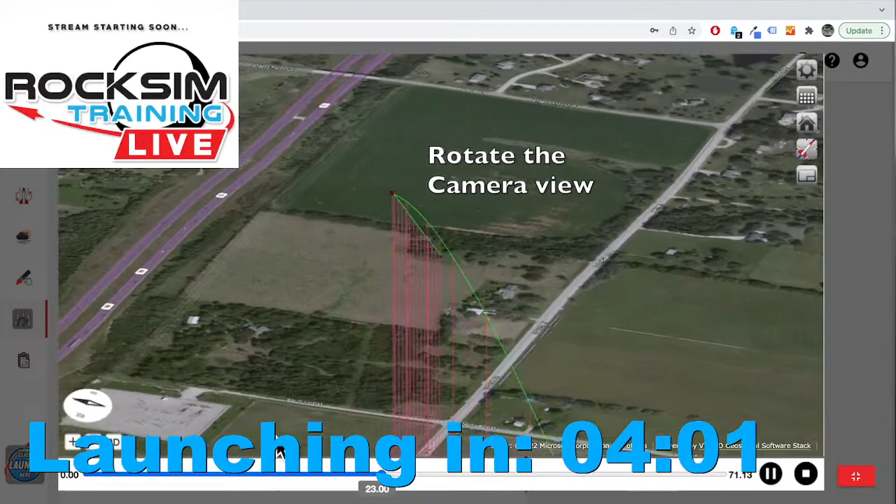Does it go straight up or does it arc over? Does it spin as it ascends? What happens once the recovery system is deployed? Where does the rocket go? How far away does it land? Will it touch down in a location where you can easily recover it?

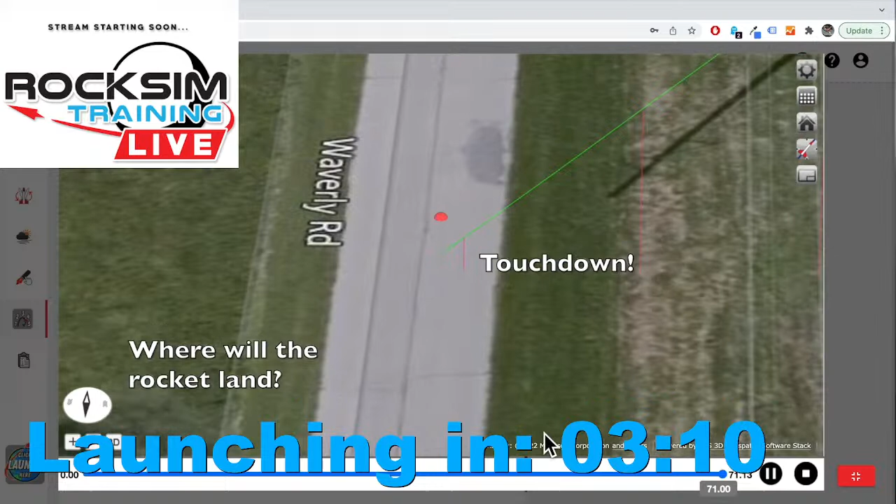Most rocketeers seem satisfied with just being told how high their rocket flew, and that's a shame. How did the rocket get to that point? That is what you should really be concerned about. The story of your rocket's flight is not just a peak altitude number. The real story is the trajectory path that your rocket takes during the flight.

Does it go straight up or does it arc over? Does it spin as it ascends? What happens once the recovery system is deployed? Where does the rocket go? How far away does it land?

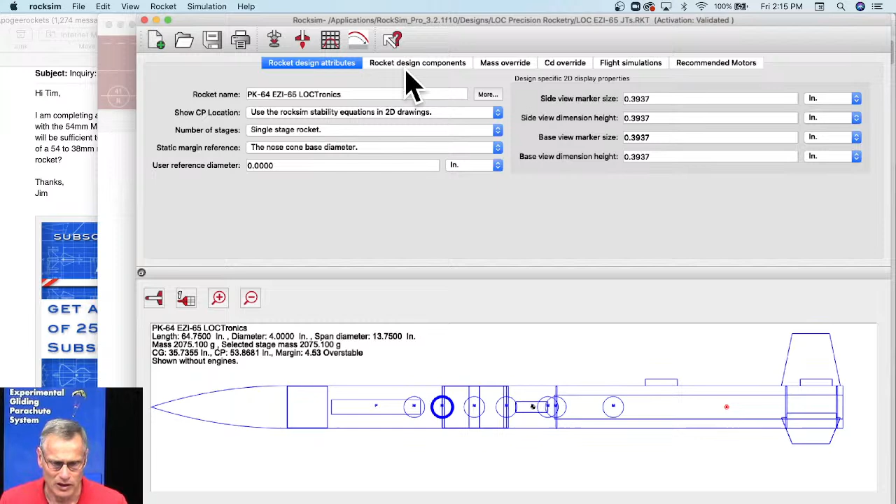So one of the first things that you might notice if you're using RockSim previously is now there's circles in the 2D drawing. And what those are is mass objects. We did that so that you can click on them and highlight them. This is one of the new features. Let me quit on that so we don't get these notifications popping up. So it's like this one here is all these mass objects, and you see these mass objects here in the parts tree.

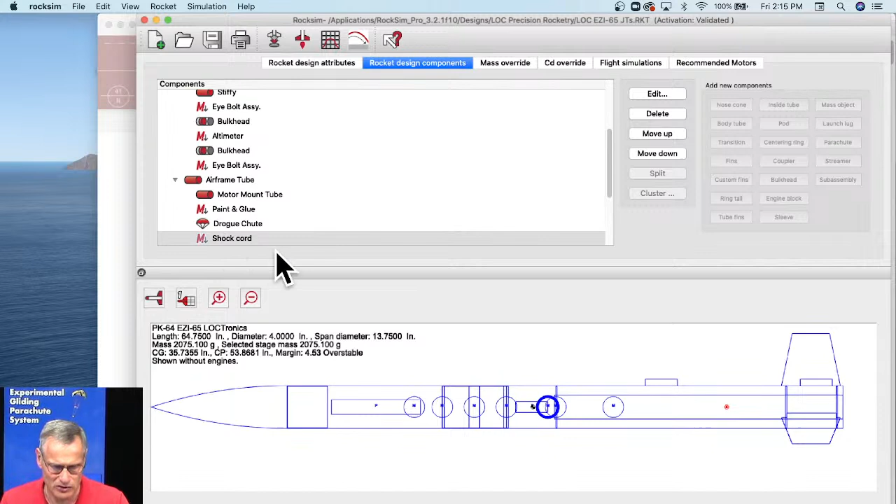But I don't know which one it is, but if you click on them, like if I click on that one right there, it highlights it up here and it says that this mass object is the paint and the glue. If I click on that one, that's an eye bolt assembly. That one right there is a shock cord. So we did that so you can find them easier.

And similarly, in the 3D view, it'll be the same thing. You'll see those components highlighted. So right now I'm clicking on the shock cord and you're seeing everything else grayed out except for that mass object. So the mass object in the 3D view is now a sphere. So if I click on the paint and the glue, here's an eye bolt assembly. It shows me where it is in the parts down here.

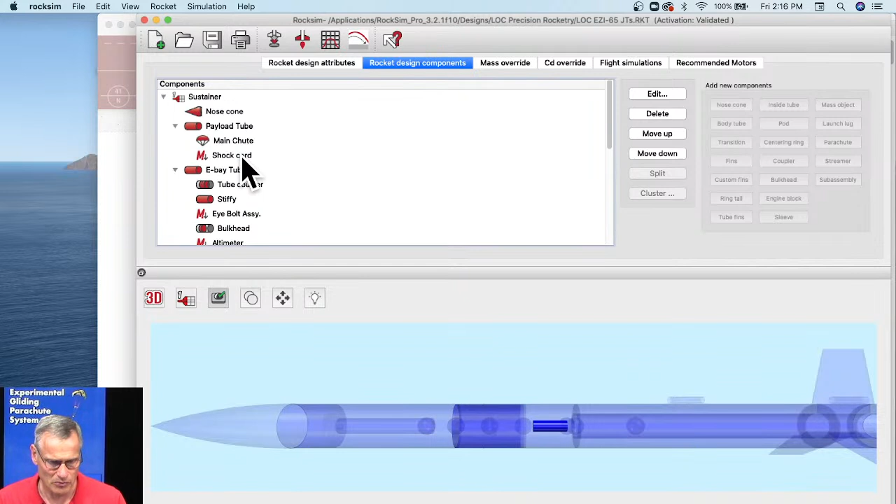Another change is that parachutes didn't used to show up in 3D, but now they do. They show up as cylinders, like right there. So that's a parachute. This one's set up as dual deployment, so it has two parachutes. And if you want to see the full rocket, you just click off of it.

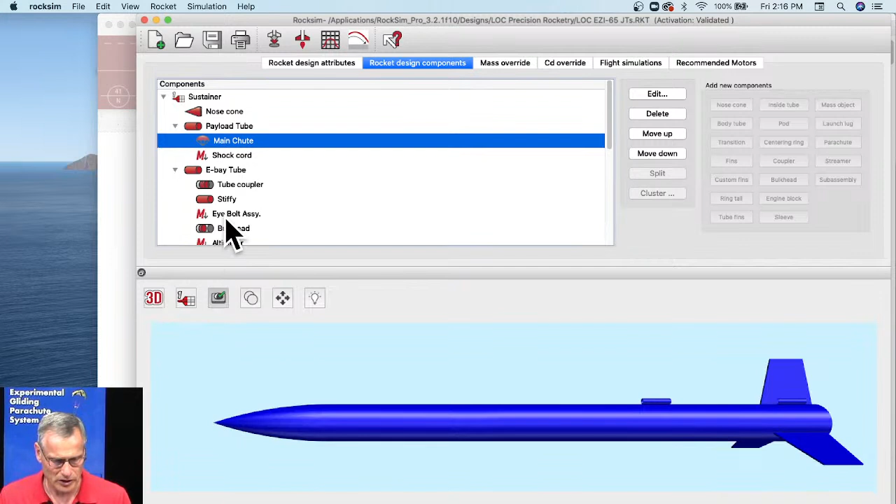Okay, so that's the new stuff, but we're here to answer how to do a motor adapter. So let's find the motor adapter. So it's inside this main tube. Launch lug, motor mount tube right there. So here's our motor mount tube, and I just want to confirm that it's a 54 millimeter, and here's where you confirm it. It says the motor diameter that fits into that tube right there is 54 millimeters. All right, so that's good.

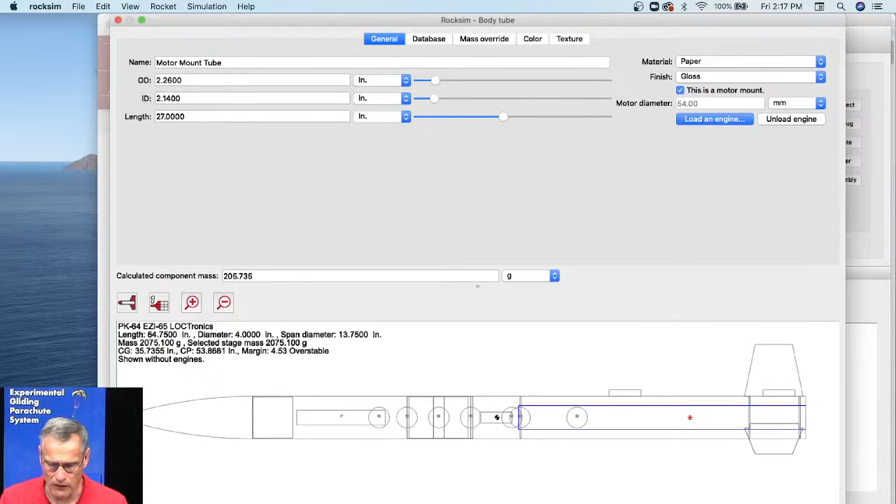Click OK. All right, so now there's two ways of adding the motor adapters. There's an easy way and a hard way, and I'm all for the easy way. The easy way is basically what we just talked about, a mass object. Putting a mass object inside of the rocket to account for the extra weight of that item. And the reason I can use a mass object is because it's on the inside of the rocket and it doesn't affect the aerodynamics. It's only going to affect the mass of the rocket. So I can use a mass object. So I'll show you that way first.

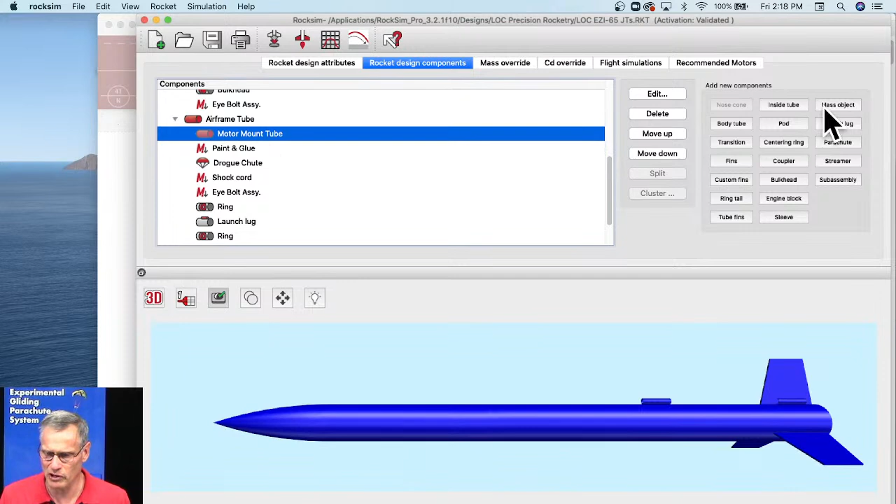First I got to decide where I'm going to put that mass object. And let's see, we just had that motor. Okay, so the motor mount tube is highlighted. Once it's highlighted in the parts tree, you can come over here to mass object. Okay, and it looks in the database for different mass objects that are already in the database. And if I enlarge this, there might already be. So we got Aeropack retainers, 38 millimeter retainer. I'm looking for maybe something that says adapter.

I'm just scrolling through here. I'm not seeing anything. Sometimes they're in here, sometimes they're not. You can add them if you want. Here's a slimline adapter. 54 to 38 adapter. I don't know what a slimline adapter is, so I'm just going to cancel out of the database.

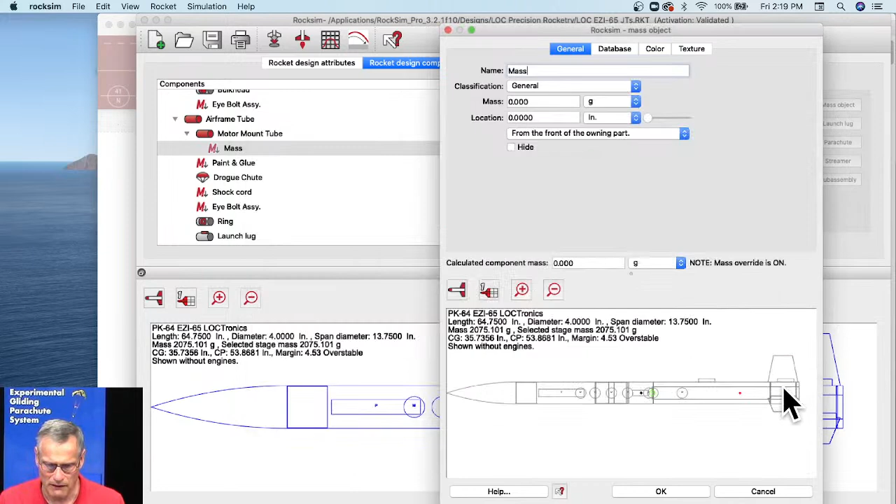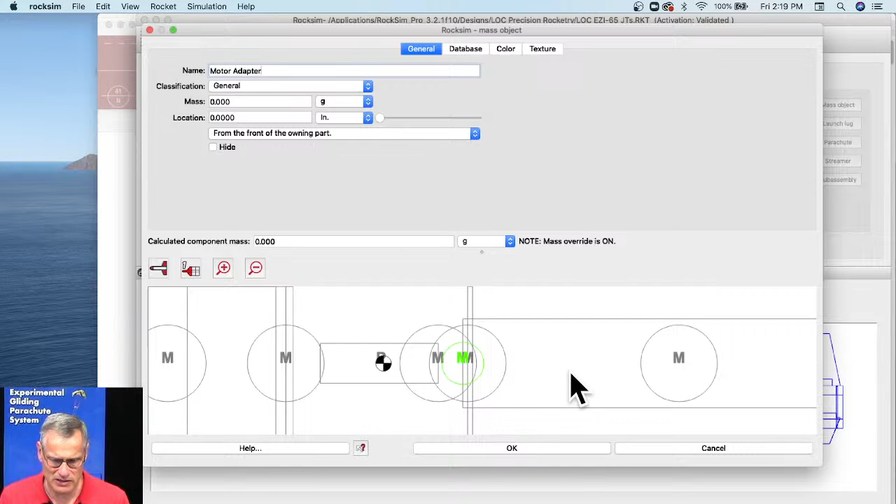And so right now on my parts screen, if you can see it, it's right here. I got a new sphere showing up. It's green right now. And this is going to be my motor adapter. And I'm just going to type it in. But now I need a mass, and then I need to switch the position. And I can move the position pretty easy because I know it's going to go back here. So I'm just going to change the location of that motor adapter. I'm just going to put it right back here where I think all the weight is going to be concentrated.

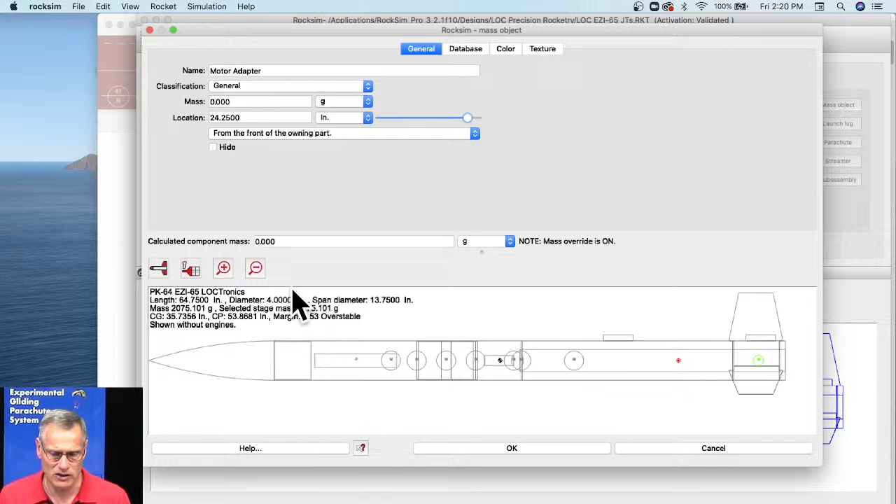Notice here, this is another new feature in RockSim 10.5. We have a hide button, and this is only available on mass objects. And this would be a good condition to use this. You can hide the mass object from the weight of the rocket so it doesn't see it. So it's kind of like if you pulled your motor adapter out, you could still fly the rocket, and then you could put it back in and do more simulations with the motor adapter in.

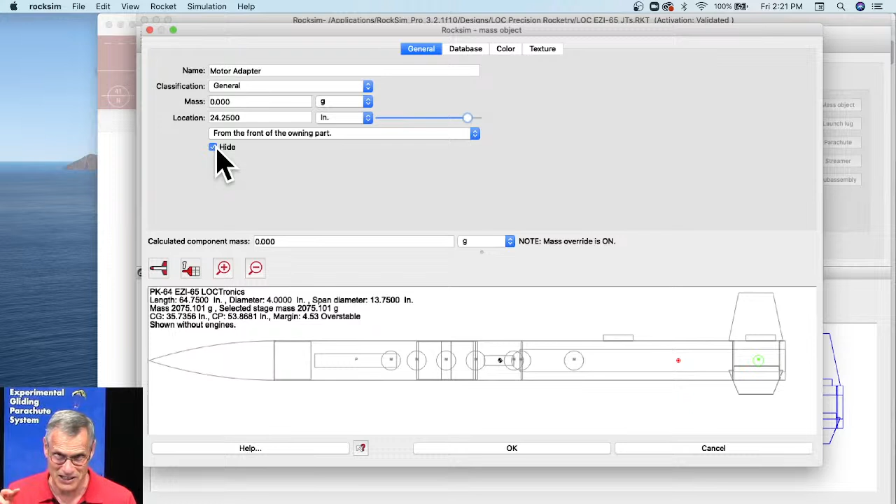So this is a new feature. The ability to hide mass objects was always in RockSim, but it was a hidden feature. You didn't know it was there. In fact, I didn't even know it was there. Somebody pointed it out to me. They were clicking on things and they discovered how to hide it and unhide it. But we made it more formal where it's easier to hide and unhide.

But I don't know the mass of this adapter, so how do I get that? So I'm going to go to the Apogee website and I'm going to search for an adapter and see what shows up. Okay, so it's not showing up here. Reload adapter system, 54 reload adapter system, motor adapters. Let me try that one. Nope. Okay, so I know where they're hidden.

They're under shopping. Go to building supplies, and then go to, I'm looking at the pictures, looking for my motor adapters. Right there, motor mount kits and adapters. So click on that. And we want a motor adapter kit. Okay, so now they're sorted from smallest to biggest. So I'm going to jump into the big sizes, 24 to 38. We want a 38 to 54. Okay, so there's one right there, an Aeropack 38 to 54 motor adapter.

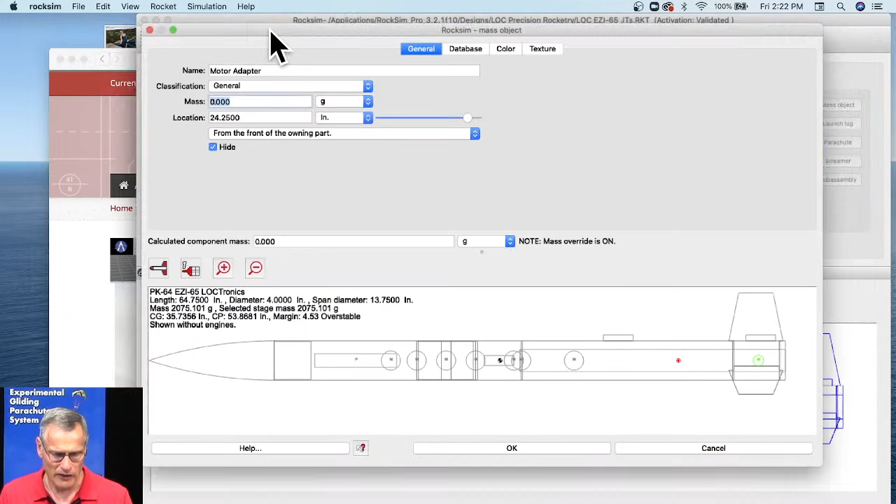So I'm going to click on that, and here's the weight right here. So 86.5 grams. So I'm going to go back into RockSim, and that's what I'm going to use for my mass, 86.5 grams. Make sure your units are right, and then hit tab. And when you hit tab, you'll see the mass change here, or maybe it already changed. Nope, I got it hidden. So when I unhide it, this mass should jump up by 86.5 grams. And sure enough, it did.

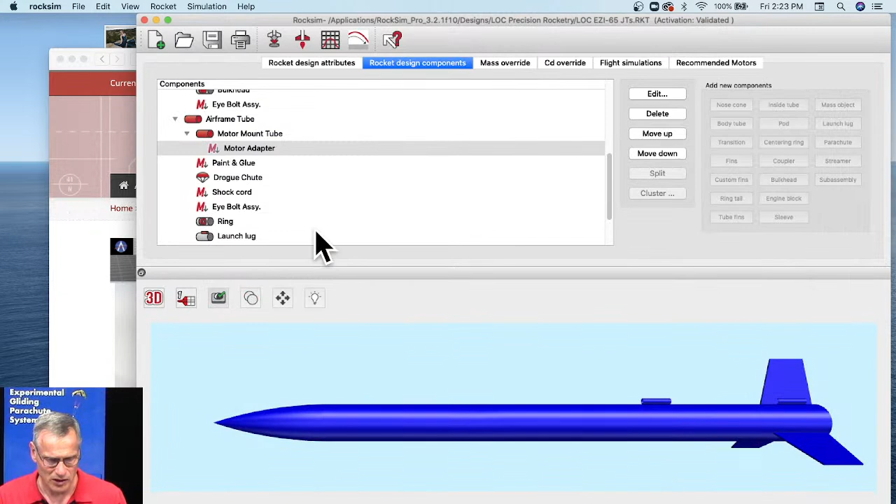So that's what it does, it kind of pulls it out of the rocket, even though it's there, but it's not there. So make sure that you check this. I'm going to leave it hidden, and I'll show you where you'll see it. Click OK there. So now my motor adapter is added. So that's that motor adapter. There should be a little thing that says hidden here. See, if you right click on it, it says show hide, and that's how we found out that it was there.

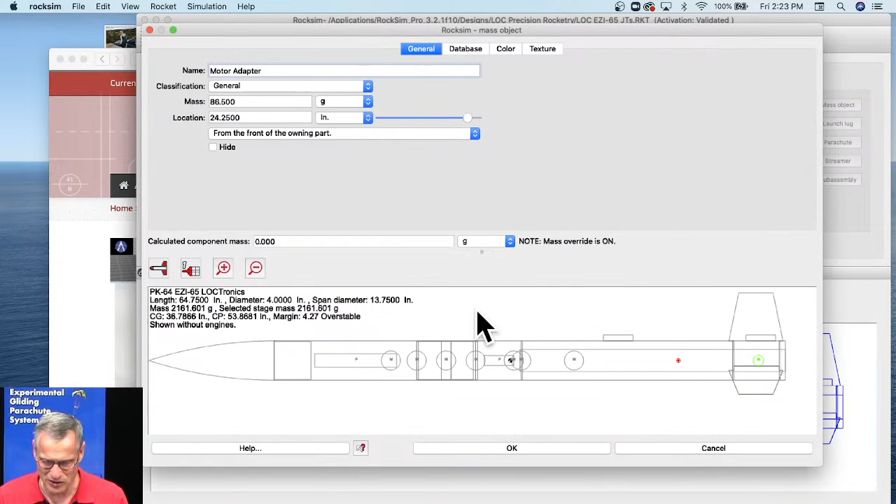So what's going on? I just want to make sure it's not hidden. Okay, it's not hidden. I'll click OK. Okay, so that's that motor adapter, and now if I click on it, sure enough, it's still there. Now we can run our simulation. So I'm going to go to prepare for launch, choose an engine, and see right now it's showing just the 54 millimeter motors, but I want to show 38s.

So I'm going to go show those that match or are smaller. So if I do that, now I see all the motors. You can see I'm scrolling through them. You can see the different diameters. I can sort them by diameter just by clicking on the column. And so now they're sorted. And if I scroll down, I should eventually get to the 29s and then the 38s. Okay, so here's the 38 millimeter motors that will fit. I'm going to choose a J270. And I'm going to choose a 14-second delay, and I'm going to click OK.

And what I wanted to look for, and this came up, somebody asked me this the other day, is what happens if you put a motor in a rocket and the motor mount is short. This one has a really long motor mount. But what if it's short? How do you tell if the motor is going to interfere with a bulkhead? And in RockSim, unfortunately, there's no way to tell except by actually looking at it.

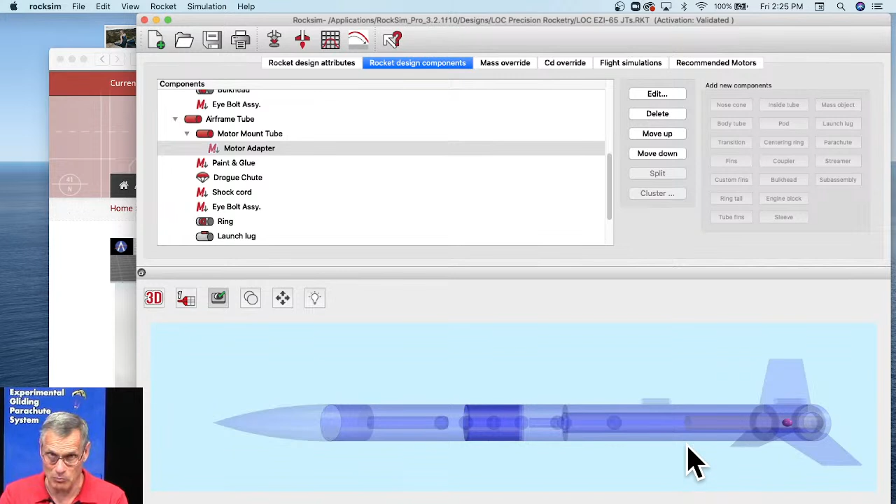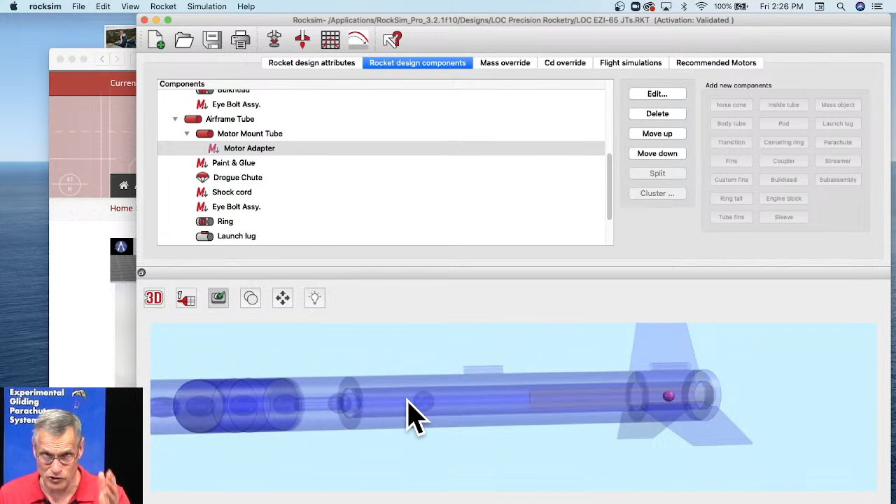So I don't know if you can see it here, but the rocket is translucent. There's the motor tube right here. And then this darker blue one here is the motor tube. So here's the motor tube, and this one does not stick out. So that's what you have to look for. You actually just have to look at it from the side view and see if it sticks out. So this motor will fly, and I can go and launch it.

I just want to double check my simulation conditions here. Flight events. This has got dual deployment. So the main chute is at an altitude of 400 feet, and the drogue chute is set at apogee.

We're going to have to change the launch rod, make it 98 inches. Launch angle, we're going straight up. Launch conditions, we're at altitude 700 feet above sea level, and we got some wind of 6 miles an hour. And if I do flight profile, I can see what it's going to look like.

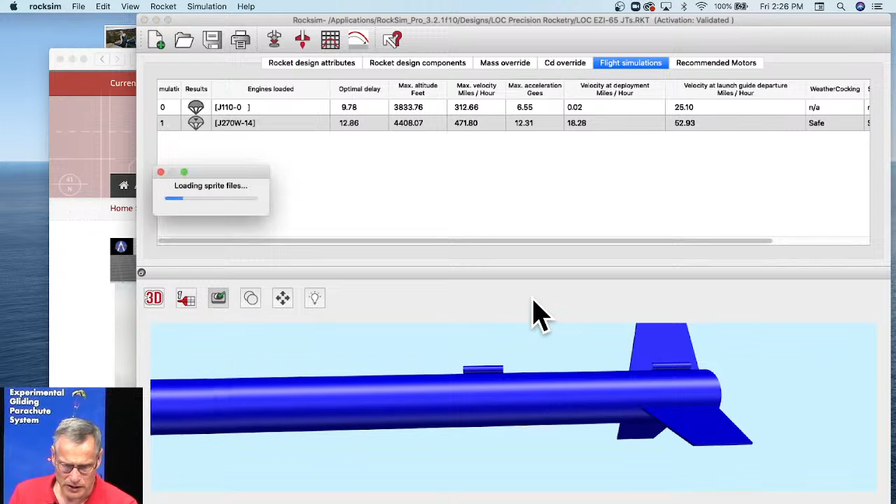So here's the rocket down here at the bottom. And when we launch it, you'll see the rocket take off. Here's smoke coming from the motor. The motor's burned out. Now it's coasting. It's well over 3,000 feet right now. I don't know if we're going to get to 4. Yeah, we got to 4,000.

And it's hitting the top. Apogee, the parachute popped out. So that's the drogue chute. And it's falling pretty straight. And when we get down to an altitude of 400 feet, we'll see the main parachute come out. And I'm going to speed things up by grabbing the slider. You can see it's coming down pretty fast. We're at 700, 600, 500, 432.

Okay, so now at this point, the main parachute came out. And you can kind of tell that the path came down straight, but when we got to this point, it kind of dog-legged. So that tells us that the main parachute came out. And this one landed only 292 feet away, so it's not too far away. So we're not going to have to walk too far to get it.

So that's good. Our apogee point was within the weathercocking cone, these dashed lines right here. We want the rocket's apogee point, the highest point in the flight, to stay within that cone. That tells us it's going more up than sideways, because we don't want it to go sideways, because that's not safe and it makes for a longer walk.

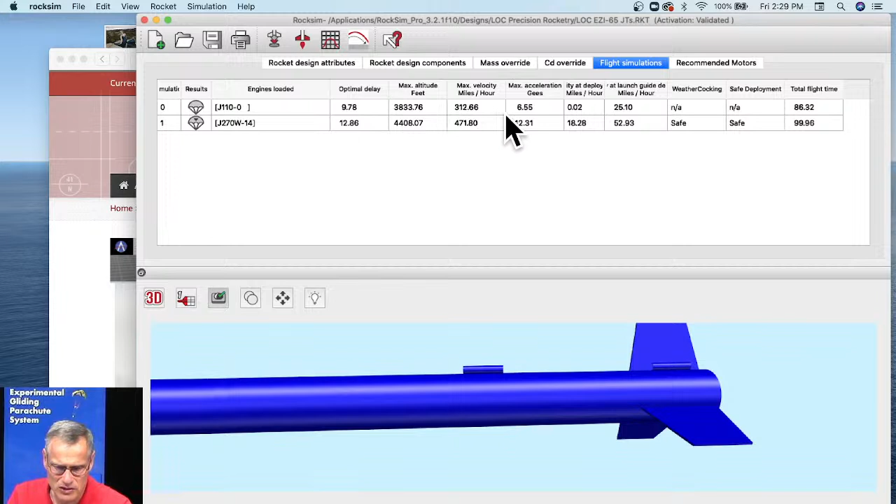So the second part of his question was how do you tell if these are safe flights? Well, one is you're looking at them, and you're looking at these conditions right here. You can also run the recommended motors. And again, you go to prepare for launch. Then you just click on this button right here. And there's this thing that says use smaller motor diameters too. So I'm going to click OK.

And the engine type, I'll just do single use to do a shorter number of motors. Otherwise, if we do reloads, there's hundreds of them. I'm going to make it an 8-foot long launch rod. And we'll just do the Aerotech motors. And then it just says run recommended conditions, and it's going to run 61 motors. So that's 54s and 38s. Usually it's not going to run all the smaller motors, smaller than 38. I think it just does one size down.

You see, it runs the simulation twice. The first time it did 61, now it's doing 30. So approximately 31 motors it didn't like. And it says RockSim not recommended. That's this column right here under the recommended motors tab. So before I was under the flight simulation tab. Now when you hit the recommend motors, it jumps to the recommended motor tab.

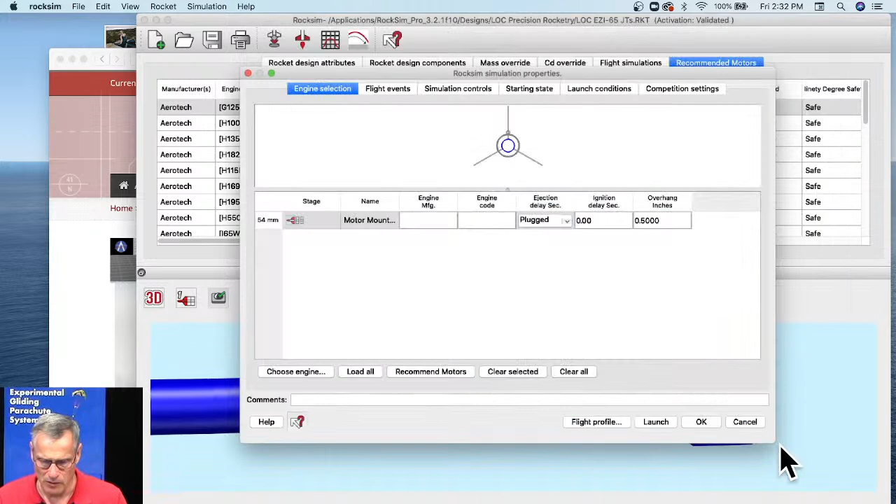So if I go to choose motor, now I'm looking for a G125. So I'm going to sort by the engine code and then scroll down to where I get to my G's. So here's a G125, and look, it's a 29 millimeter motor. So that motor is a 29. But that's how I had to find out that it's a 29.

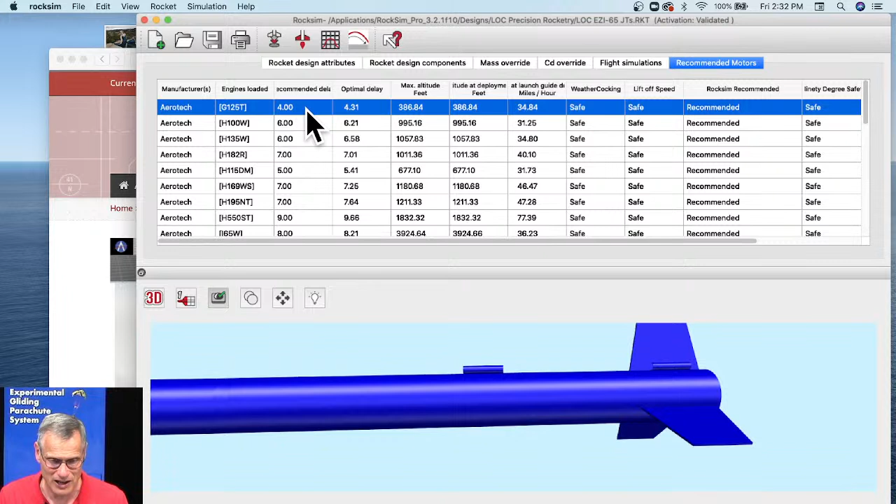But that is a recommended motor. RockSim says that should be safe to fly, so I would probably be okay with it. It doesn't go very high, only about 386 feet. But yeah, that's a 4-second delay, so you'd have to really drill down and adjust the delay by drilling it out to get down to 4 seconds, because I don't think that's a normal delay.

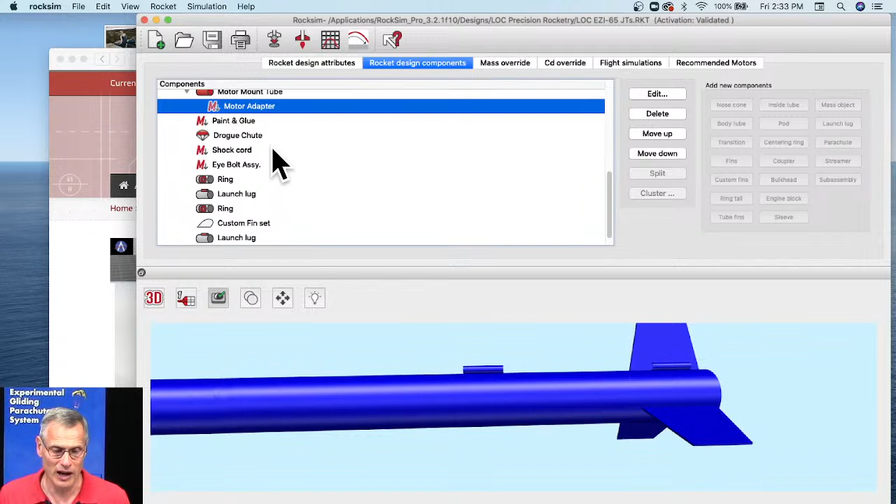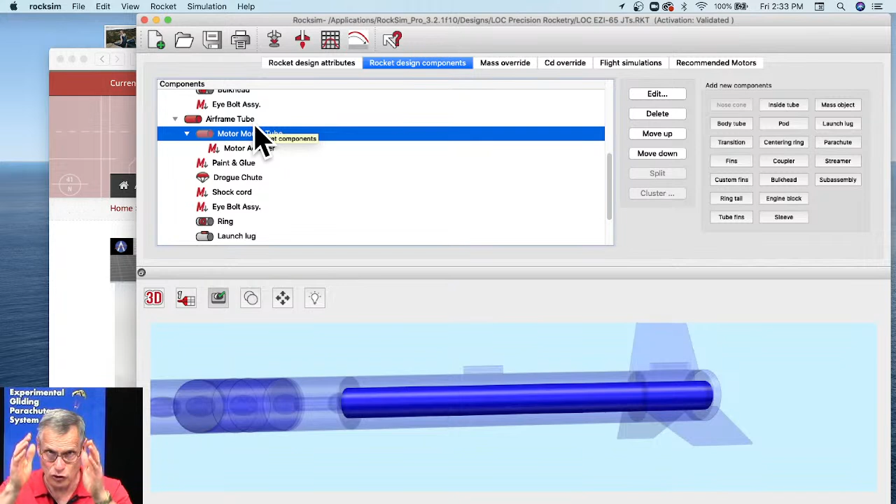So that was the quick way of putting in a motor adapter, is just to use a mass object. It's fast, it didn't take us any time. The long way would be to actually create a set of parts inside of this tube. So on this motor tube, right now it's a 54. If I wanted to put a 38 in, I'd have to start building it out of the components. So I'd probably need a motor tube and then two centering rings, one on each end of that motor tube, to create my motor adapter.

So that's the long way, because you're adding parts. And once those parts are in there, I guess you could add them as a subassembly. So you could save it and pull it in and out of your design. But using the mass object is so much easier.

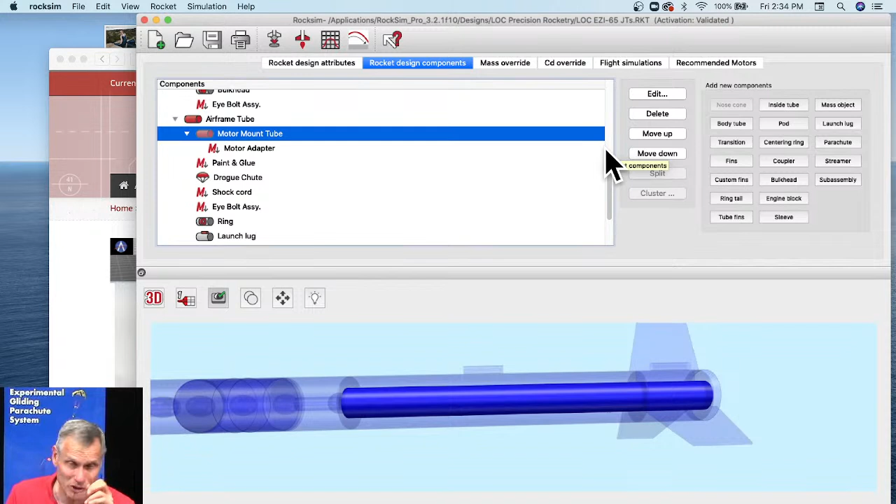Let me check my questions over here. Oh, we got people talking again. Last week we had a lot of questions, and maybe we're going to get a lot more. Terry Wheelock says, design a Concorde SST in RockSim. I can maybe show you something that's close. Johan says, I have an Estes low boom SST. Cool. Unfortunately, toasted the extended engine tube after second flight. So he had to reinforce it.

Chris Swainson says, is there a new RockSim update? And I talked about that at the beginning of this video. There is a new update. It should be available very early next week, maybe Monday or Tuesday. I am using the new update myself right now, but we should get that out pretty quick because it's done. Johan said, maybe nice question to show how RockSim handles asymmetric fins and stability calculations over 360 degrees. Okay, I can try to answer that one, Johan. Fatbank says, Tim said it should be available Tuesday, might be released on Monday, maybe.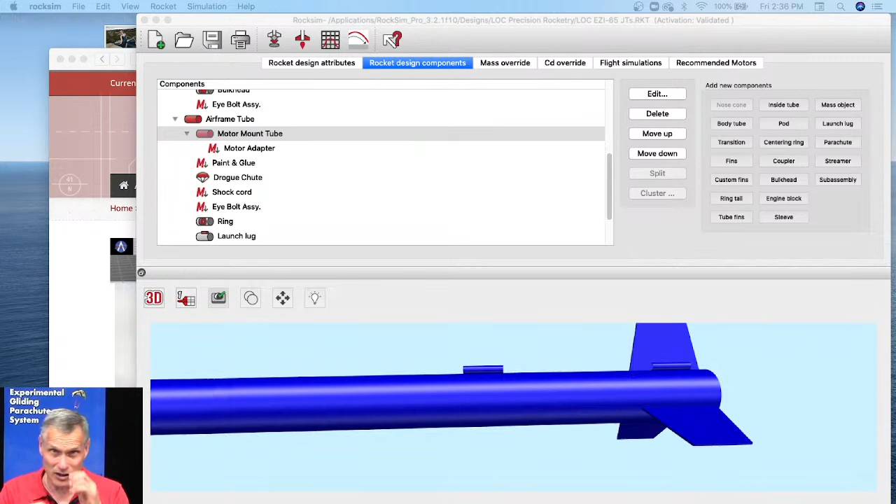Carlos says, I'm building a super roc, so I am joining tubes end to end with couplers, glues, and prayers. Any RockSim or finishing painting tips? So what a super roc is, it's just a really long rocket, and it's got a lot of couplers in it. So if you're looking for painting tips, there's a lot of information on the Apogee website. Go to How To and Guides.

Come down here to Peak of Flight newsletter. Click on that, and then go over here to All Newsletters. And you'll find them in here. So I'm going to search on this page for painting tips. Don't use the search bar because this will search the entire website. I only want to search this page because I know this is where the information is going to be. So to do that on your computer, do a Control F on the keyboard. On the Macintosh, it's Command F, and it brings up a special search bar that will only search the page.

And I'm going to say paint. And it tells me there's 4 matches that have the word paint, and it could include the word painting, because painting does include the word paint. So you can just scroll through these. It says techniques for challenging paint jobs, how to build and prep a model rocket for paint. I'd probably start with that one there, Carlos. In fact, I'm going to click on it right now. Open it in a new tab. How to build a model rocket for paint.

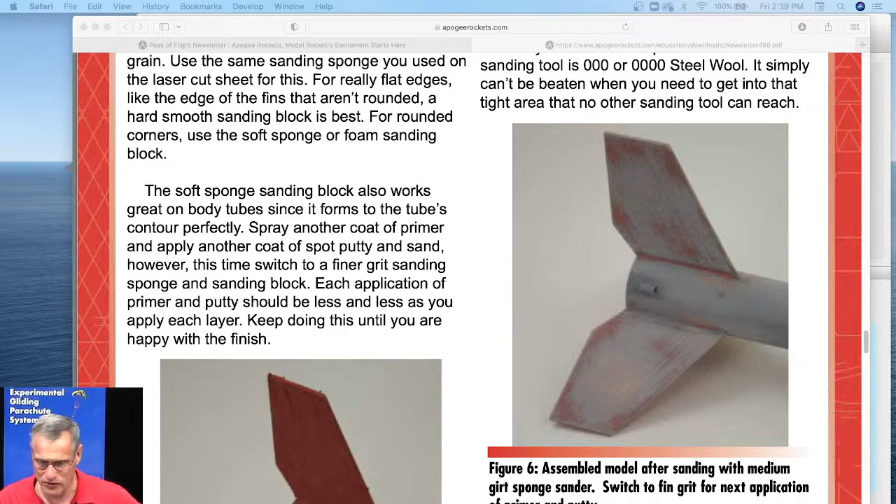Fatbank asks, do launch lugs and rail buttons affect aerodynamics in RockSim? And the answer is yes, it does. You can see that in RockSim if you go to the rocket menu and then come down here to CD analysis, you'll see right here there's a CD type of lugs. Right now we're not seeing anything because we're at 0 miles an hour, but as soon as you move the velocity up, you can see that the launch lugs on this particular rocket contribute 5.6% of the drag. So yes, that's an easy question to answer.

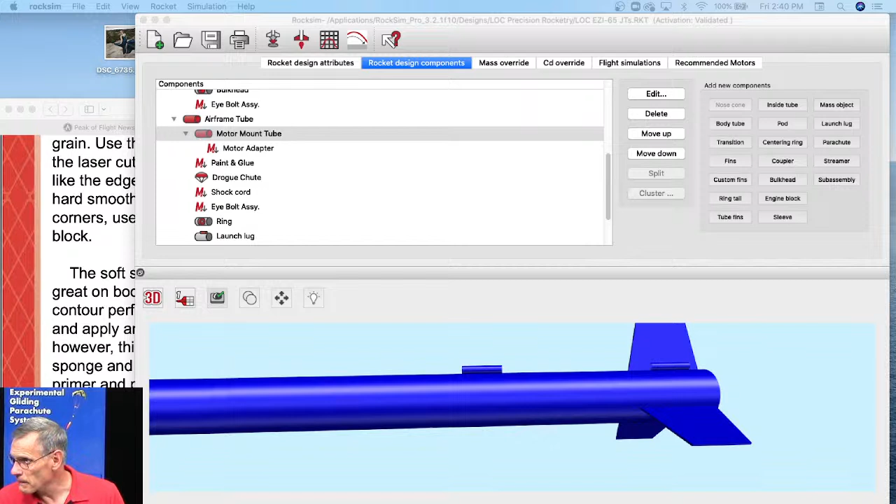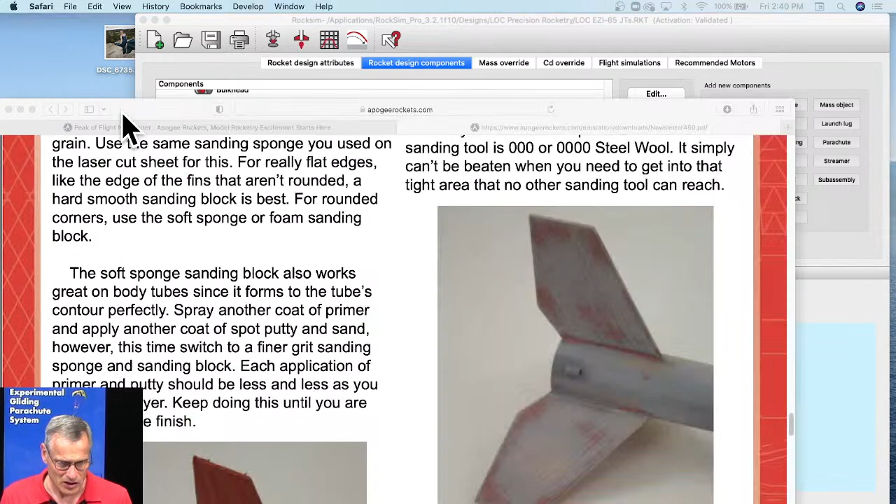Okay, but there was a question above. So we have an SST question and an asymmetric fins question. I can answer both of those with the same rocket design. So I want to go back to the Apogee website because I want to find a rocket that looks like an SST. I know there's a Semroc rocket. They did a reproduction of an Estes. So if you click on shop and then come down to rockets by manufacturer, click on that, and I'm going to scroll down until I get to the Semroc rockets.

Okay. Starship Vega. I'm trying to remember the name. Could be the USS America. Let me open that in a new tab. Okay, so this has wings on it, but that's not the one that I wanted. That would work. Let me blow that up so you can see it. So that's not quite supersonic SST style. It's not the Andromeda, UFO Invader, Starship Vega, or Starship Excalibur. Nope, not Vega. One last time. Vertical Transport, Super Hornet, Hydro Defender. I don't know. We'll go with the USS America.

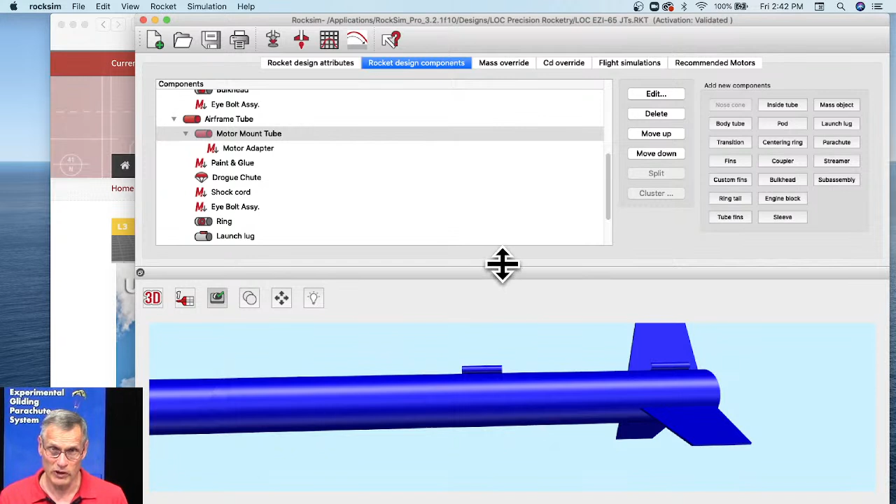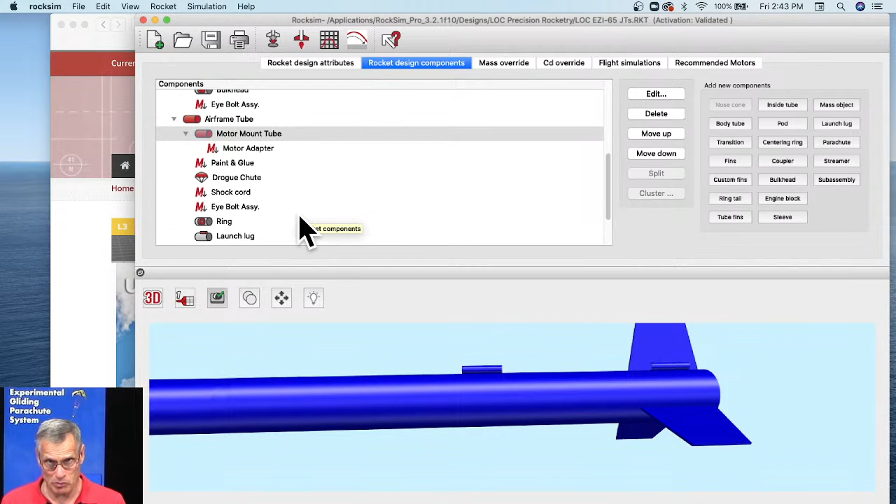Okay, so I'm going back to RockSim. Ernesto, the difference between RockSim, RockSim Pro, and the launch visualizer. RockSim was the first one we came out with, and it's our most popular because it can do a lot and the price point is pretty reasonable. Then we came out with RockSim Pro, which has more features than RockSim, and it has what's called the launch visualizer built into it. So it's 6 degrees of freedom.

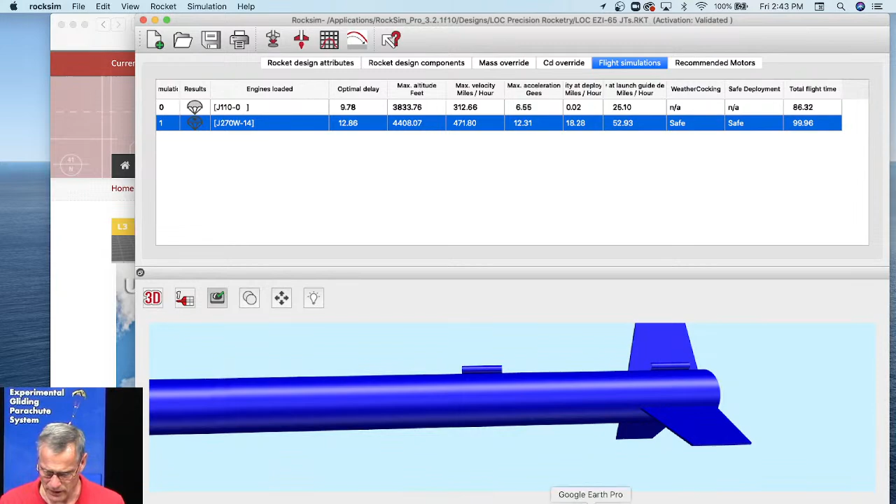I don't know if you remember when I showed you the 2D flight profile. So this is the 2D flight profile. It's this button right here, and it shows you the trajectory of the rocket. This is just a 2-dimensional representation. RockSim Pro is 3D because of the launch visualizer. I think I have RockSim Pro open. Yes, I do. So here's RockSim Pro. It looks a lot like RockSim. The difference is it still has that profile, but instead of seeing it in 2 dimensions, just a flat screen, it's going to be 3 dimensions, and it's going to be on the Earth.

So let's open up the USS America. We'll see if we can talk about a lot of different things all at once. USS America. Oh, there it is. Right here, Semroc USS America rocket. Click open. Save changes to that one? No. Okay, so here's the back view of the rocket. If I look at it from a 3D perspective, there's the rocket in 3D. It's all blue, which means that I didn't design it because I don't design blue rockets.

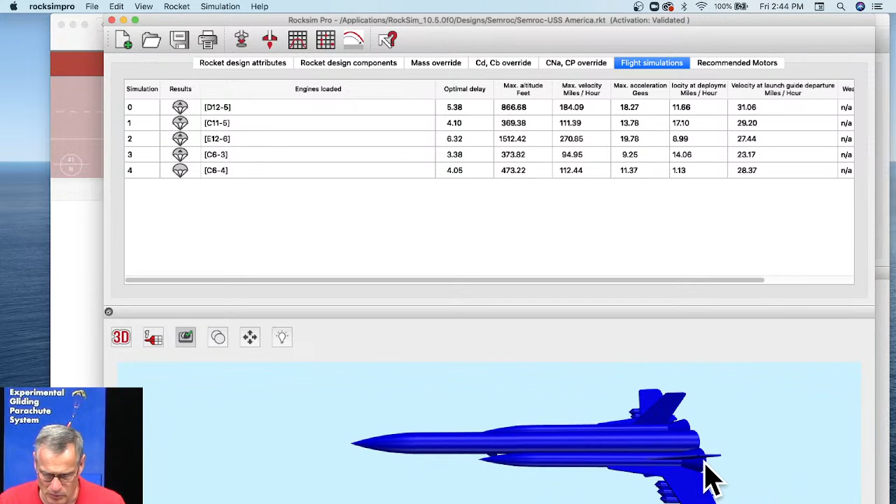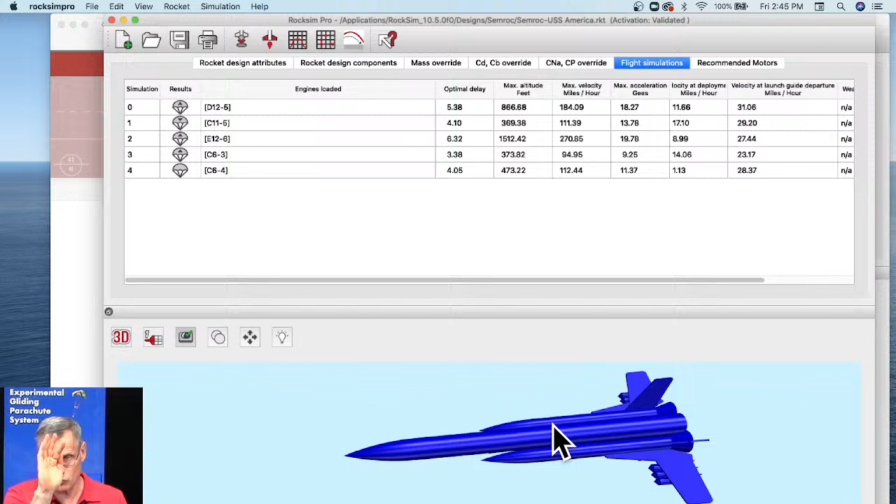But this is an asymmetrical design because in a normal symmetrical design, see these two fins here that extend vertically? If it was symmetrical, I should have fins coming out the bottom as well. So this is an asymmetric design because no matter which angle you look at it, it's different each way. On a normal rocket, like here, the Peregrine Junior, no matter which way I look at it, it's symmetrical all the way around. This one right here is asymmetrical.

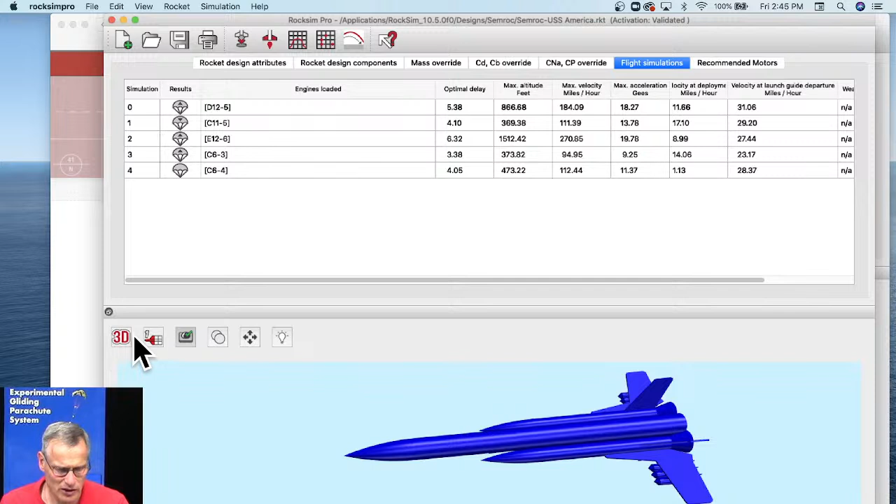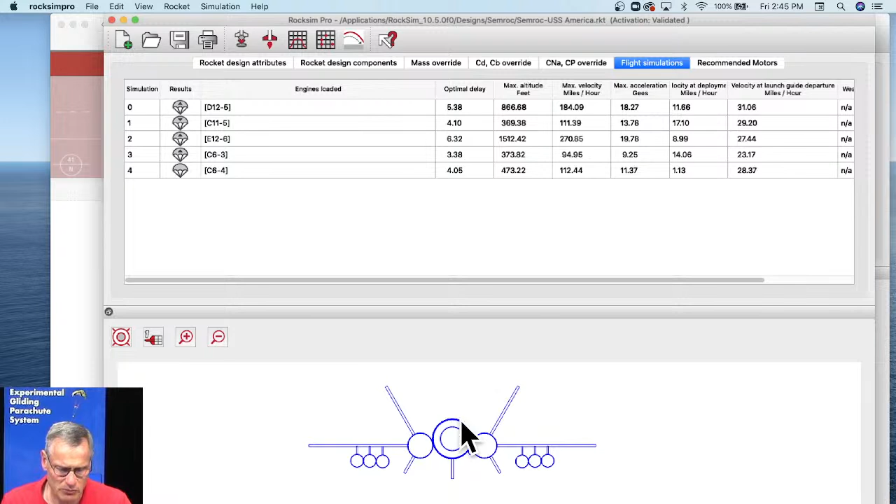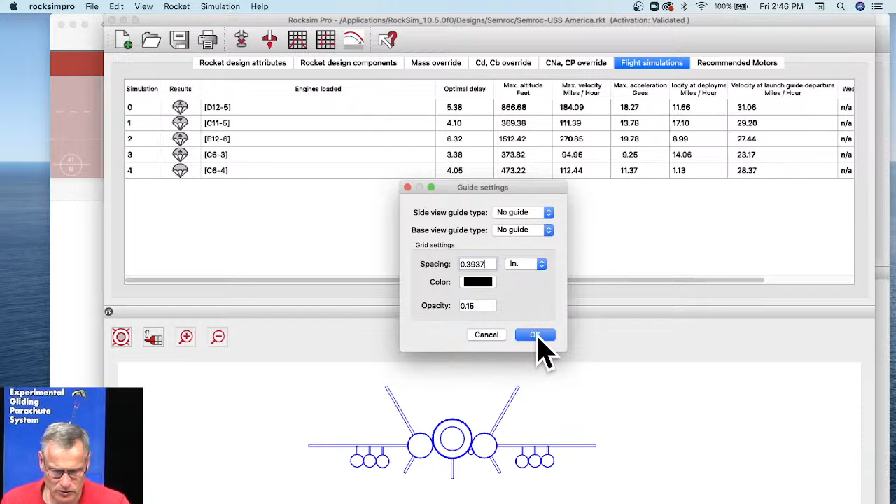So how does RockSim handle that? If I look at it from a base view, you can zoom in. I'm using my scroll wheel to zoom in, and then you can click and drag it around. So we want to know if this rocket's going to be stable or not by looking at this base view, because it's an asymmetrical design. So if I go here to, is it under guide settings? No, cancel. I think it's under the preferences. So go to preferences.

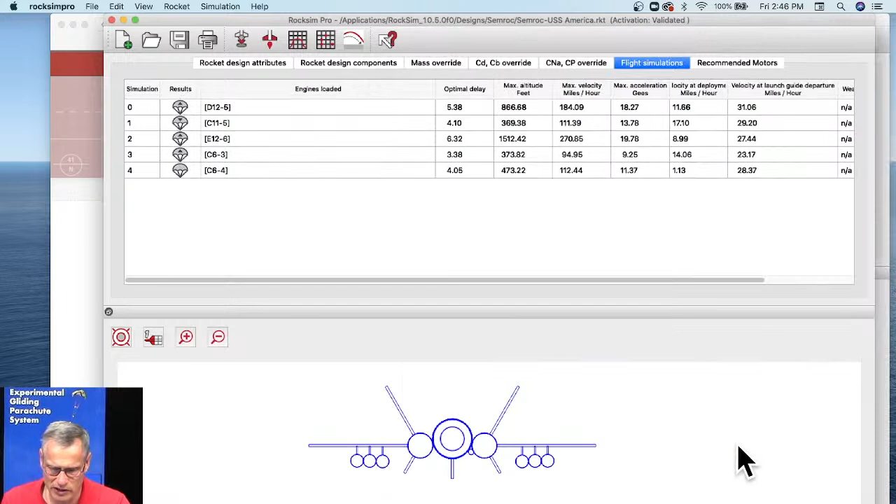Okay, so under the 2D drawing tab, which is the preferences for this screen right here, there is base view decorations. By default it's not checked, but you can turn this on, and I can also show a grid angle here. And when I click OK, you'll see that this has changed. So let me detach this window here.

Make this bigger. So this is the bottom of the rocket. And you'll notice there's this green band around here. And it almost looks circular, but you can tell it's not really a circle. And this gives me, at a glance, it's telling me that this rocket should fly okay.

Because if you're seeing green here on this band, that's okay. If it was red, that would be a problem. That means from one direction, if the wind was hitting it at a weird angle, this rocket could go unstable. So by seeing it in green, whenever you're doing an asymmetrical design, you want to look at this stability chart right here. And again, how I got there was I went to the preferences.

On the Mac, they're under the RockSim Pro menu or the RockSim menu. This is RockSim and RockSim Pro. Both of the programs have this feature. It's under preferences. I think under Windows, if you're on a Windows computer, the preferences are under the edit menu. But I'm on a Mac, so here's my preferences.

And you can see you go to the 2D drawing tab. Here's the 3D, here's the 2D. And then you make sure under base view to show the stability graph overlay and the grid angle. If I turn the grid angle off, you can see you're just seeing the green line. So if I go back to preferences, turn that back on, click OK, and it kind of tells me from what wind direction this might be unstable.

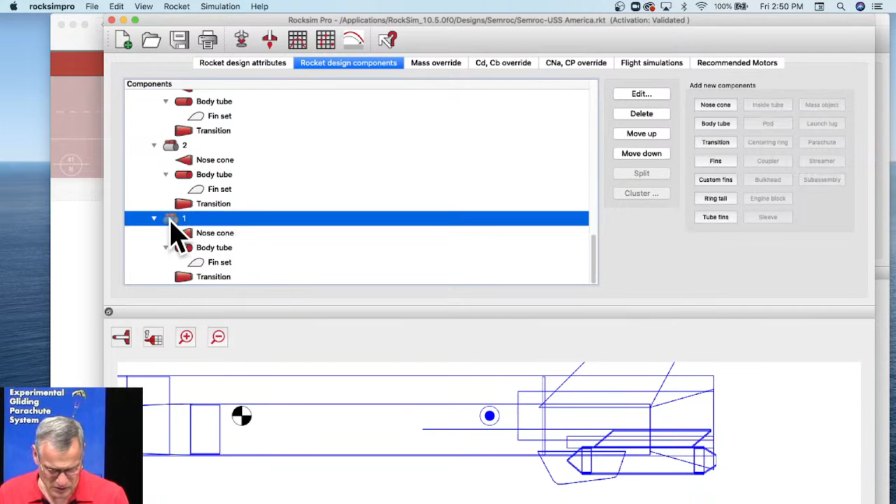So this pod number 1, which I have no idea where it is. Actually, let me see if I can see it from a side view. I think it might be right here. Yep, it opened it up in a new window over here. Okay, so that's the pod right here that we're looking at. So I was right. It is attached to this fin.

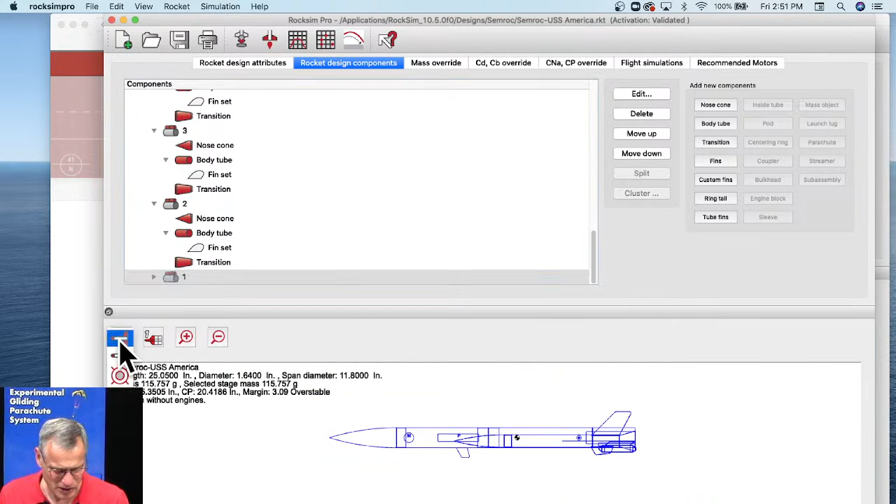Click cancel. So I want to find the pod. Let me look at it in a top view. I want to find this nose cone right here. So there's that nose cone. So that's this pod. And this pod probably includes this entire wing. So I'm going to delete it. So I'm going to cut that.

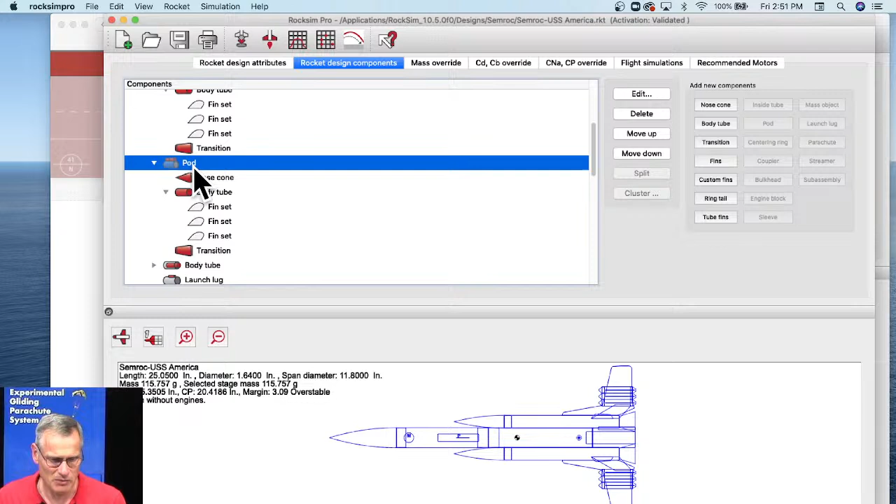And it's asking me, do I really want to cut it? Let me cancel it here. So to delete it, I just right clicked on it with my mouse. You can also go to edit and do a cut. It's the same thing, cut. And it's going to ask you, do you really want to delete it? I'm going to say yes.

And sure enough, it deleted it. But it left these pods down here at the bottom, which is kind of interesting. So I'm going to delete those as well. Yes. Cut that one, say yes.

And cut this one, say yes. Okay, so now we have a rocket. And if I look at it from the base view, it's still showing that it's okay. These fins are big enough that there's enough stability to make this rocket fly mostly okay.

I'm going to delete something else here. I want to zoom in. Let's delete this fin right there. Cut that one, say yes. We're still stable. Let's delete this fin right here. Cut that one, say yes. Do you see when we cut it, we lost a little bit of stability here.

When this green line, let me show you that again. See this line right here? This kind of represents the center of gravity, and this kind of represents the center of pressure. So as long as the center of pressure is behind the center of gravity, it's going to be stable. But if this divot right here came in to this point right there, then we're going to see it being unstable.

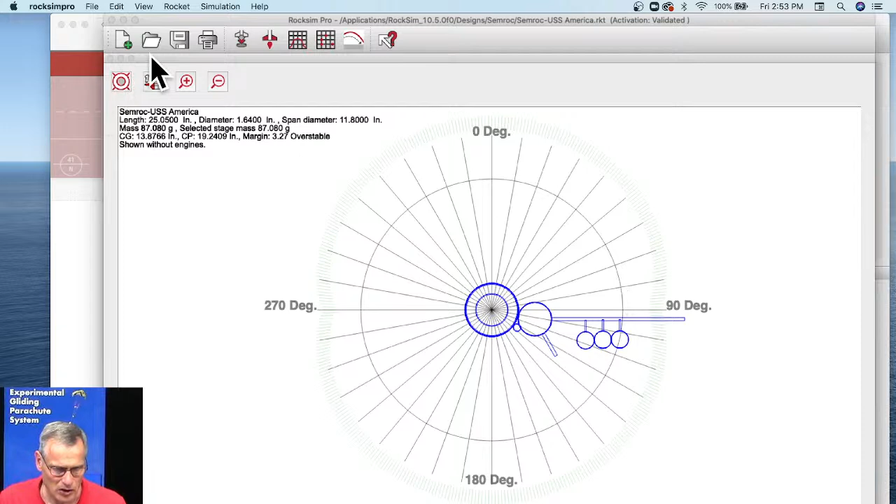So let's delete some more things. Let's delete that fin right there, cut, say yes. It moved it in a little bit more. I'm trying to delete anything that's kind of south of this center line. So if I take that fin right there, cut it, say yes. A little bit more unstable. Take this one, cut that one, say yes. Let's do one more. Cut, yes.

I saw the center of gravity also shift in a little bit. I don't know if you noticed that, but it moved just so slightly in, and that's reasonable because we took weight off the back of the rocket. I'm going to have a hard time making this one unstable. We have to try deleting these nose cones, because nose cones add stability. Delete.

Oops. What happened? Oh, I had a crash. RockSim crashed, or that was RockSim Pro. That was not the newest version, that was an older version. But it's the same thing here. This is that Loc EZI-65.

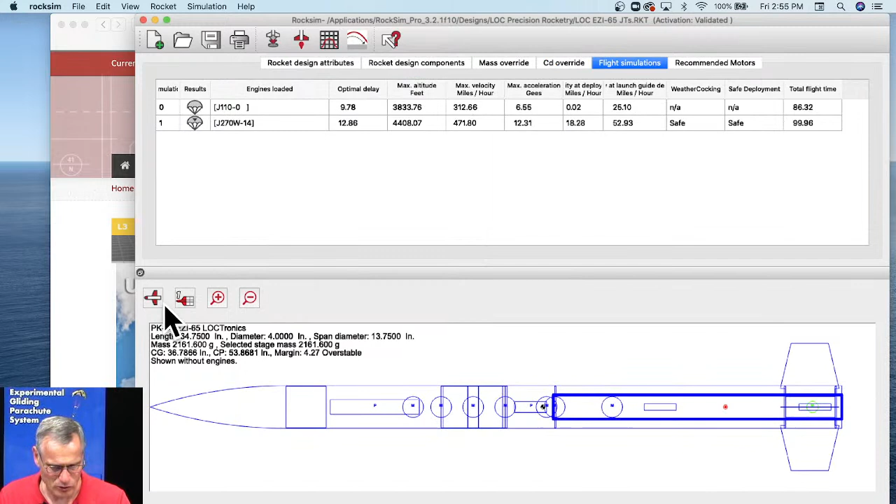So I can go again to the stability, preferences, show stability, click OK. And if I go look at it at the base view, you can see this one's really stable. And if I go to the fins, where's my fins? Right here. Let's split the fins. So right now, this is a set of fins. It's a set of 3. If I split them, I'm going to break them up into 3 individual fins. I'm going to say yes.

And that crashed. Oh my goodness. That shouldn't have happened. Let's see if we can do that again. EZI. Okay, so here's the rocket again.

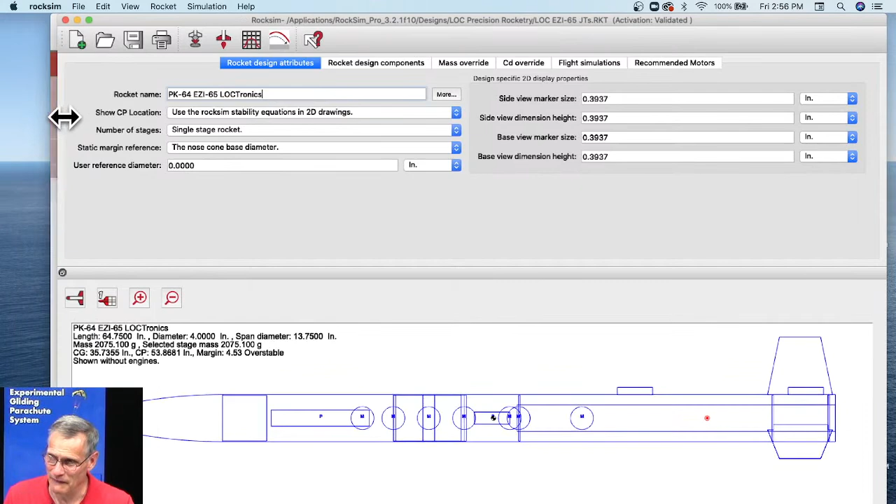So we went to the design components, we went to the custom fins, and we split the fins. Say yes. Okay, so it split them. So I got fin 1, 2, and 3. It left the same name, but these are individual fins. So I'm going to take this fin right here and delete it. Say yes. Click this one, delete, say yes. And now let's look at it. Stability graph overlay. And I want to look at the base view because that's where it's shown.

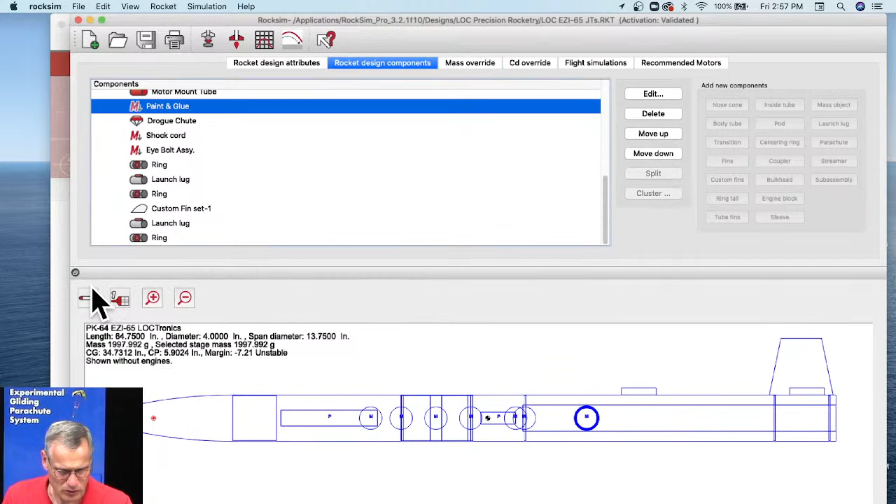Okay, so on this particular graph, you can see that it is unstable if the wind on this one comes from the 0-degree direction or the 180-degree direction. So this is 5, 10, 15, 20. Okay, so these are 5, 10, 20, 30, 40, 50, 60, 70, 80. So each of these lines is 10 degrees apart. So we're looking at approximately 15 degrees.

So 15 degrees, minus 15 degrees, 165 degrees, or a negative 165 degrees, or 180 plus 15 is 195 degrees. So I'm just remembering those numbers, because what I'm going to do now is I want to show you, Ernesto, what the launch visualizer is.

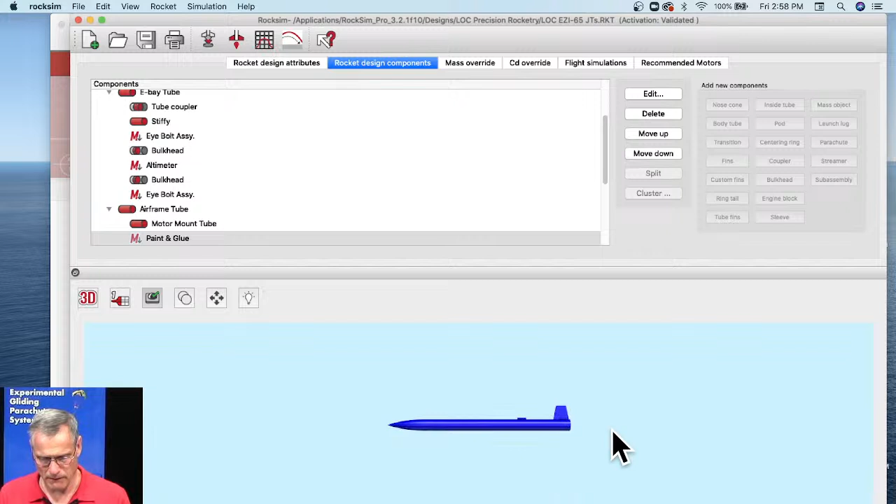Okay, so we're going to save this design. So this is a 1-fin rocket. So if we look at it in 3D, it's just 1 fin. And in some directions, this rocket will fly okay, but in other directions, it's not. So I'm going to do a file save as. I'm going to throw it on my desktop. EZI-65 1 fin. Hit save.

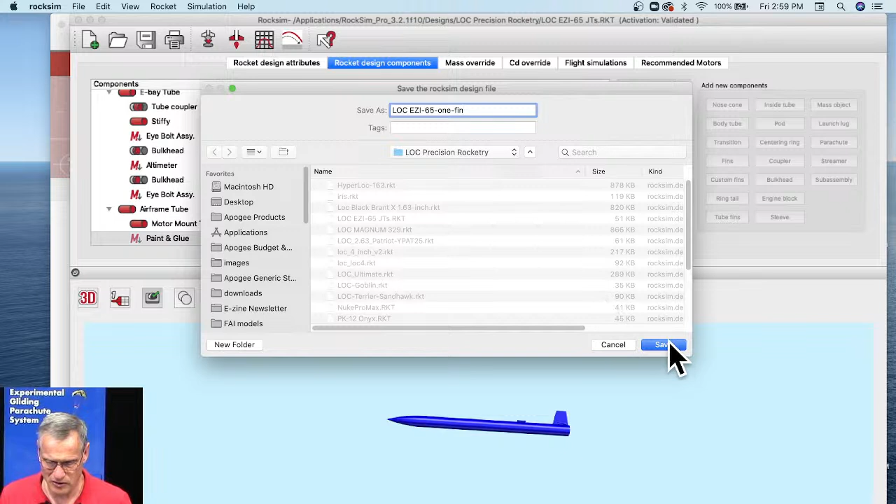So I saved it. Now I'm going to go to the launch visualizer. Now the launch visualizer is in the cloud. It's on a website. So you got to open up a new browser window, and then you just go to rocksim.com. And this brings up the launch visualizer. Hopefully my internet connection is fast today.

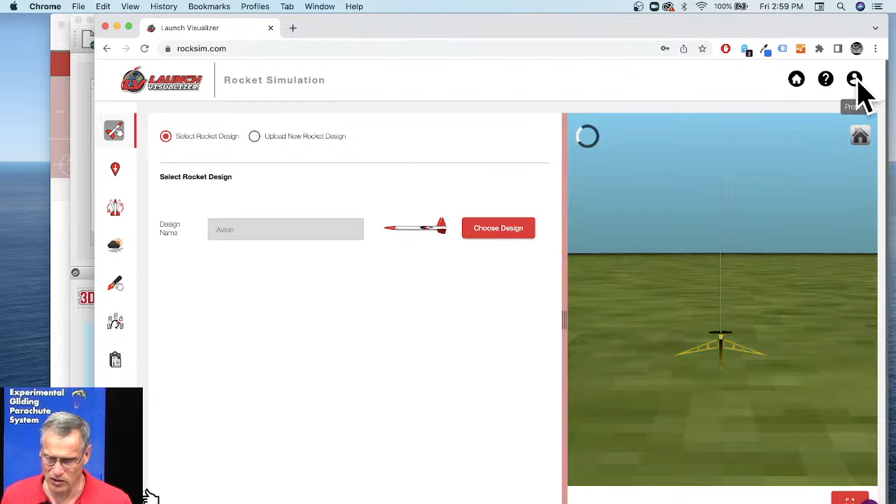Okay, so I'm going to log in because you need an account to do this. So sign in. Okay, so now I'm logged in, and I can tell that because the login button went away, and now if I click on my profile, I can see I'm a premium user. I'm going to upload the new rocket design that we just created. And I'm going to hit browse, and it's going to look on my desktop. I am looking for that EZI. Where did I save it?

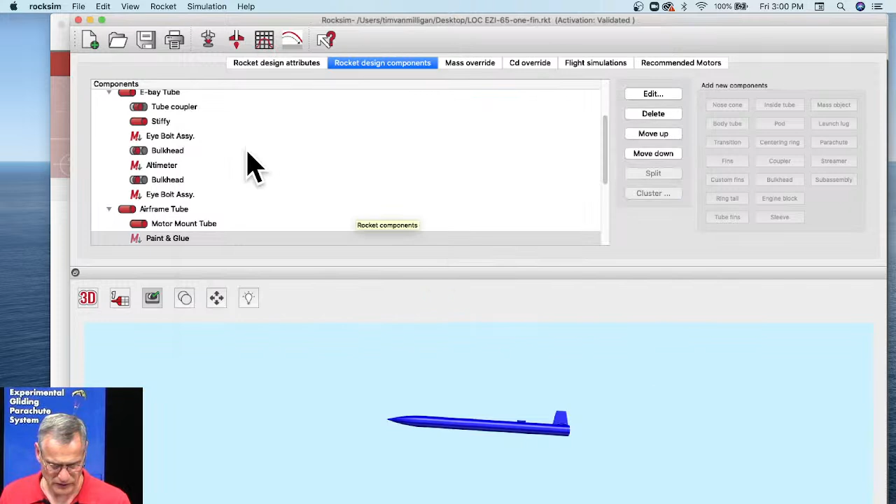Oh, shoot, I don't remember where I saved it. File, save as. I put it in the LOC. Let me resave it on the desktop. Save. 'Cause I just want to know where I put it. So now when I go to browse, I should see it on my desktop.

Desktop. Date modified. There it is. EZI-65 one fin dash rocket. Open it. I'm going to upload it to the cloud. This will take just a second. Okay, so here's the rocket sitting on the launch pad. Oops, I zoomed in too far.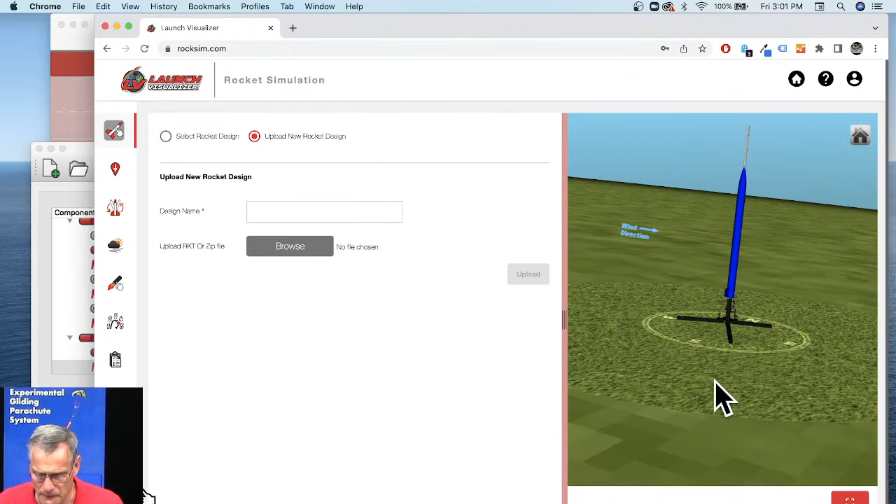This you can rotate around. You can see I've got one fin, just like I designed it. And the wind is coming from this direction, from the west. We said if the wind is coming from the 0 direction, you know, kind of like 15 degrees west of north or 15 degrees east of north, this rocket will go unstable.

But in this direction, where it's coming from, it might be stable. So first let's launch it and see what this trajectory looks like. We should be stable or close to it. This is the launch site. It's loading the map right now, but this is the SCORE launch site. This is where I launch from in Pueblo, Colorado.

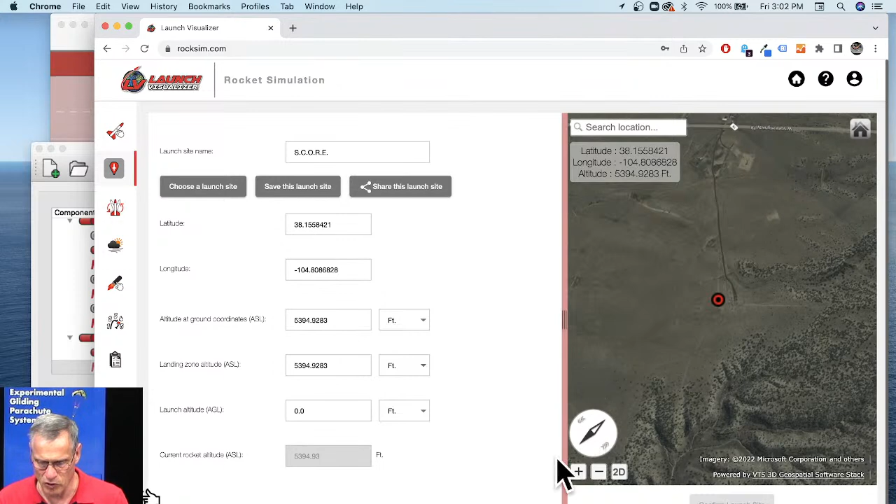And again, this is a 3D environment. So Pueblo is off this direction. North is down this way. I can swing this around and make north straight up. Okay, so now north is this way. Our launch site is southwest of Pueblo, so this road right here, if you follow that road, it would go into Pueblo.

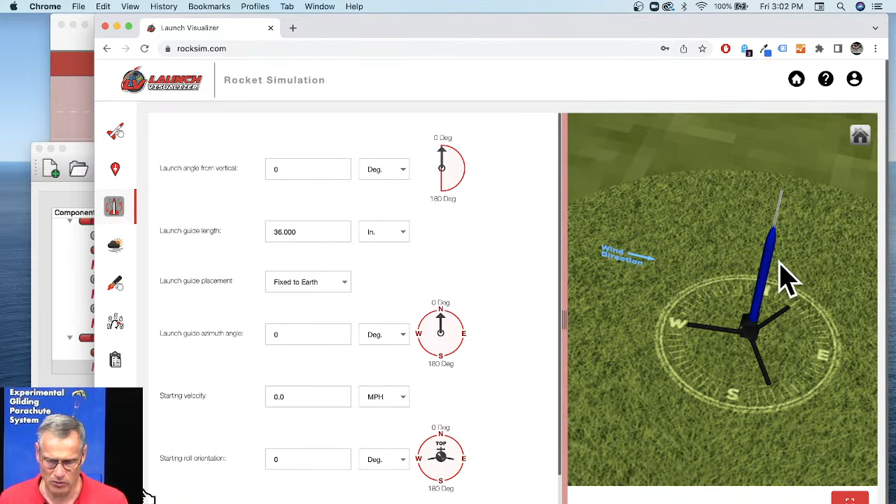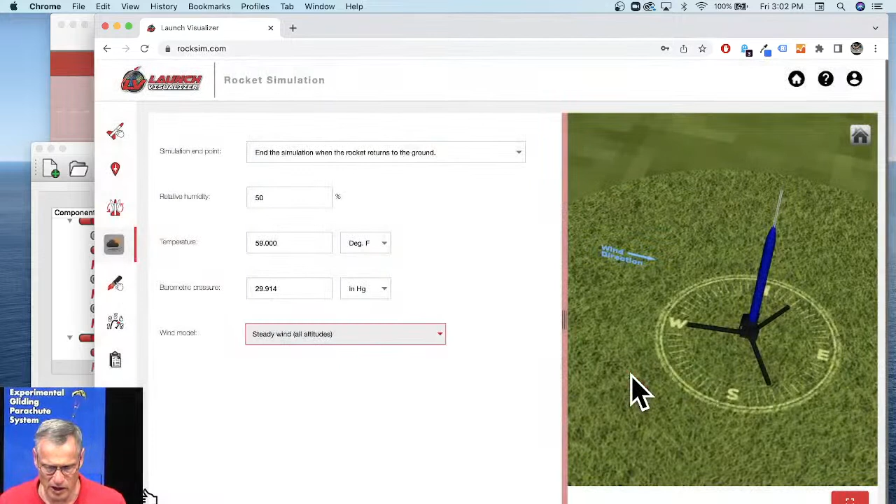Starting state, we're launching straight up. And our wind is a steady wind, and we need to know what the direction is. So our direction is 270 degrees. And so from what we saw earlier, it should be stable. Let's make it 6 mile an hour wind. Click OK. Now we choose a rocket motor right here. Choose an engine. Click on it. There we go.

Here's an I-65. That's exactly where the name of this kit comes from. EZ I-65, so they designed this particular kit around this motor because it's a long burn motor. It burns for 8.26 seconds, and so people wanted a long burn motor that was safe. So we'll choose a custom delay, and we'll give it 14 seconds. I don't know what to use, but we'll try that.

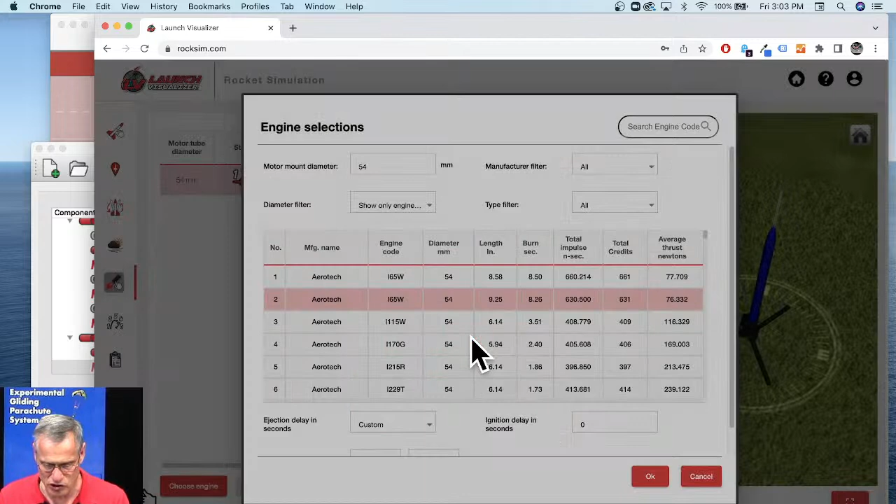Click OK. Then we're going to go to flight events. This has 2 parachutes. Remember, they're both in the upper stage. One of them is the main chute, and one is the drogue chute. So the drogue chute we want to deploy at apogee, and the main chute at an altitude, we'll call it 400 feet. So you have to first set the altitude and then give it a number, and then hit tab.

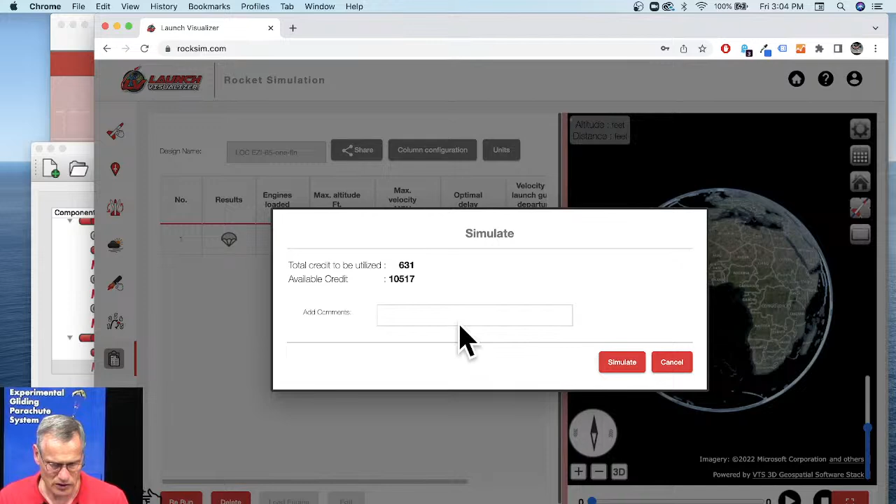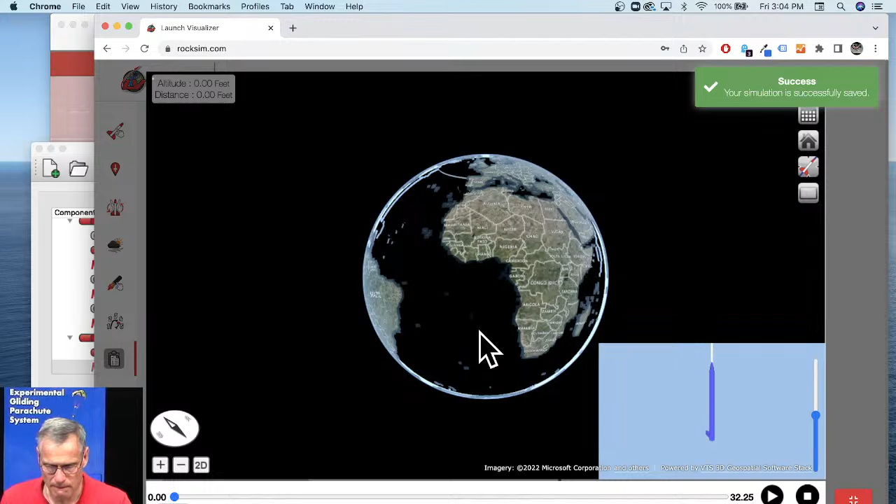Okay, so at this point it's ready to launch, and so we're going to launch it. It tells us how much credits we're going to use to simulate this. And it's running the simulation right now. Okay, so it's loading the maps. That's why all that flashing is going on there. So I'm just zooming out. Here's my flight line right here. Here's the launch pads. The rocket sitting on the launch pad.

Let me turn on some things here to remember my camera view. I want to see the weathercocking cone that we talked about in RockSim, and I want to see the trajectory path, and I want to see the extruded flight path. So the extruded flight path is the path along the ground.

Click OK. So now you can kind of see the cone, and I'm zooming out because the launch visualizer will give me an indication of how high the rocket's going to go by the height of the cone. So already I know that this rocket's going to go up, and it's going to go up at least that high.

So here's the rocket down there, and then I can just click the launch, and the rocket is taking off, and I got a large view right here. And the rocket, at this point, it goes unstable. So it went mostly straight, but then it's still burning, and now it became stable again. Look at that. Wow. I did not expect that.

I want to see that in a kind of a set view. Look at that. So the rocket took off. So remember, down here was our flight line. It took off. It went mostly straight, and then it kind of arced over. But then it became stable again and went back up. And then it deployed the parachute and then came down.

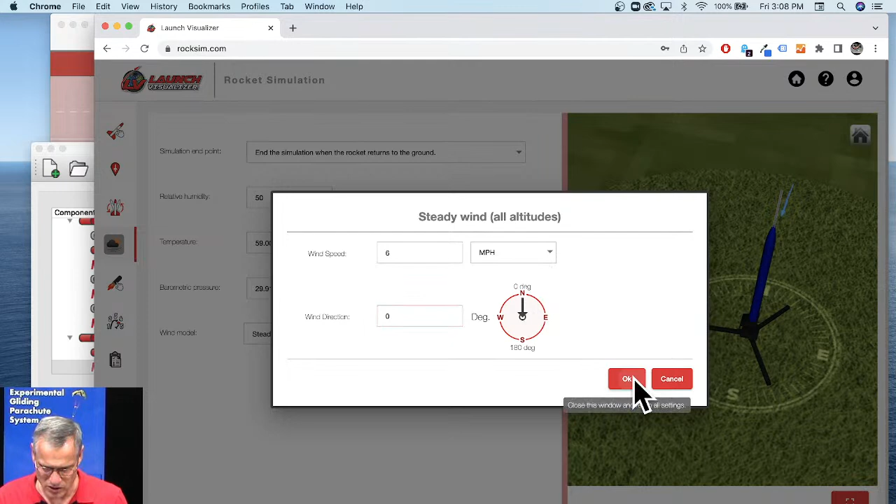So now the wind is going to come out of the north, and from this direction the rocket should always be unstable because it's not hitting any fin at all. So you can see my arrow, the wind, it's coming out of the north. I got my one fin, and the one fin is hidden in the shadow of the body tube. I'm going to leave the motor alone, and I'm just going to launch it and see what happens.

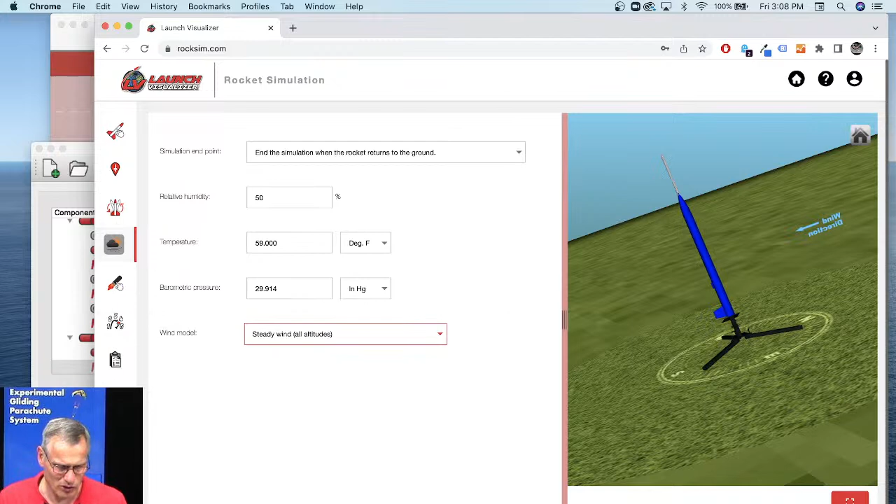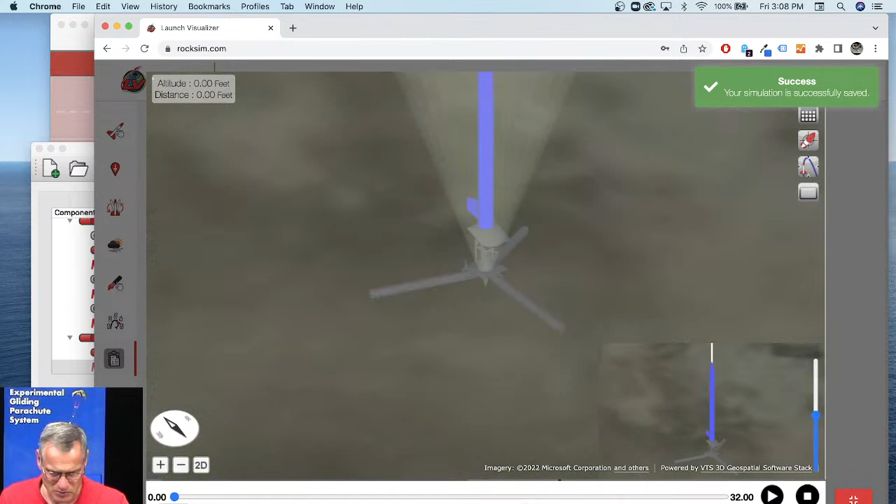So I expect a different trajectory than what we just saw. It still says it's going to go about 32 seconds. Oops, I need to back off. I'm zooming out. Oh, I got pretty much the same trajectory. Should have been different. I was expecting something different.

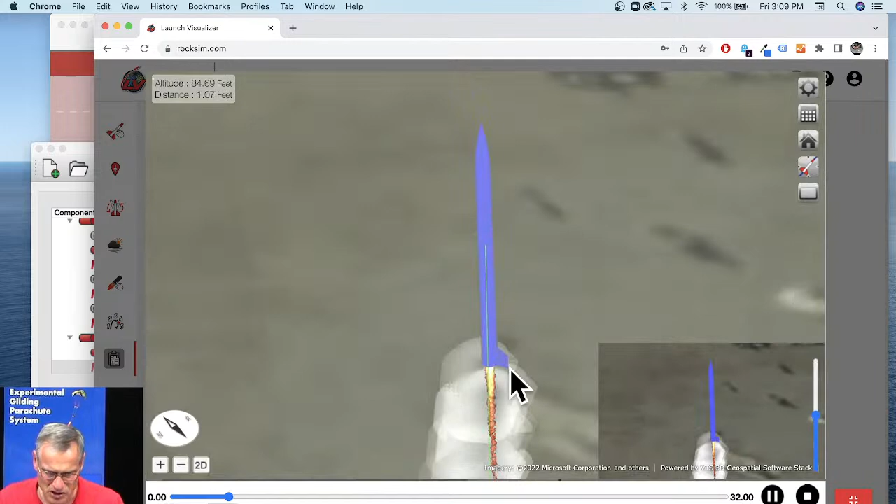Let's look at it from a different view. I'm going to pause it and then start it again. Oops, stop it. Start it again. So as it comes off, it's not rolling at all. Only right there did it start to roll. And then it got stable again. And I don't know how come it got stable again. Should have gone unstable.

But that is asymmetric fins, how to tell if it's going to be stable, and also the differences between RockSim, RockSim Pro, and the Launch Visualizer. The Launch Visualizer, what you see on the screen right now, is already built into RockSim Pro. So RockSim Pro allows you to design rockets and simulate them, whereas just the Launch Visualizer that's in the cloud on the website rocksim.com only does the simulations. It doesn't allow you to design a rocket. So those are the simple differences between the three different softwares.

An orbital transport. Yeah, I could have looked at the orbital transport too. Jeff Gortowski says, just finished the Aerodactyl. Cool. That's awesome. It's a great rocket. I'm just seeing if there's any other questions that I haven't answered yet. Oh man, we got a lot of people in the house again today. Thank you everybody for showing up. Johan says, are we also exploring digital boundaries here?